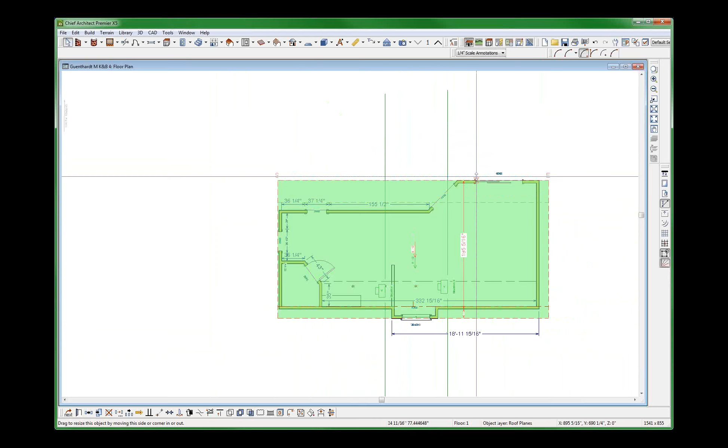Timer started, 8 minutes. I think I just learned that I am limited to, you'll be happy to learn, only a 10-minute video on this stuff. So here we go. This is what I want to do. I always believe in having a floor over a floor. I've done this before, so I sort of know where I'm heading on this. I'm just fixing this roof for DG so it's all copacetic like this.

Now, Shift G, and I'm going to try to really whiz through this. I know what DG wants. I just do. He told me this is terrible. He's got a soffit right there. He doesn't need a soffit right there. If you look at the picture, you'll know what he wants to do. The only way to do that, I think, is first of all, you always need an extra floor. Add an extra floor, build new floor up above. Yes, okay, perfect.

Now I'm going to go downstairs and I'm going to select this wall, and this wall. Control C, go up a level. 6 to paste. I don't want the door there. The purpose of this is to create that soffit that DG has over his doorway in there. So you pull this over here like this, because I think if you look at the picture, it's just a little offset like that. Delete this, come across like this, and create a floor right here, U.

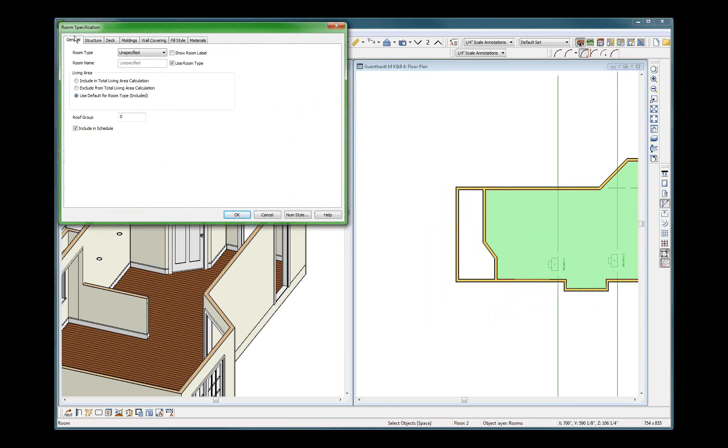And the floor is going to be, I'm going to change the floor structure to, just because it's easy for me, 11.25 tabs, so it's a 12-inch floor structure right there, okay? 108's fine. Done. This right here, U, no ceiling above this. And I'm going to tell you something right now. You cannot use that ceiling for the flat ceiling that he wants.

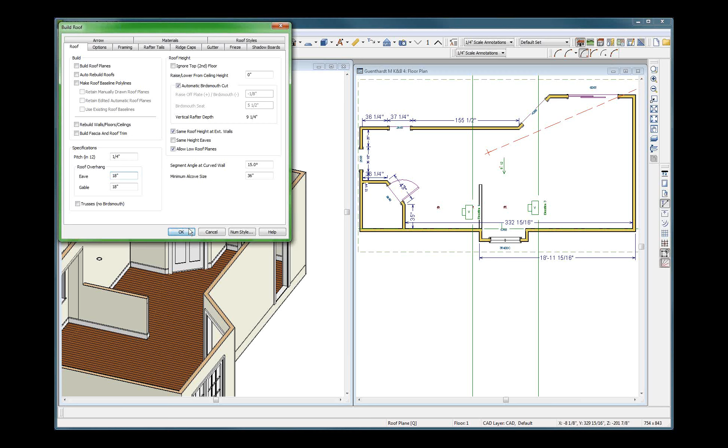So I'm going to go downstairs and I'm going to create a ceiling right now, just so you know what it looks like. He knows what this is. I got to change my roof pitch to 0, but it'll default to 1/4 inch, and I'm going to build a ceiling now. Go over to here to ceiling. What's flashing? Oh, I better hit this. Hopefully that didn't mess. So here's my ceiling. I'm going to build a ceiling like this, and he ends that ceiling right there. It ends short of that corner, okay?

Now the question is, did I build this at the right level? I don't know. I'm going to take a look at it in just a second. So that's that one ceiling right there. Shift F12 to take a backclipped cross section to make sure that ceiling's in the right location. Where's the ceiling? Oh, I got to turn on my framing. Automatic framing, you just always need it on, I think. 1, 2, and roof. Automatic roof ceiling. So I take sections FRA, ceiling, floor, turn on all this so I can see the framing.

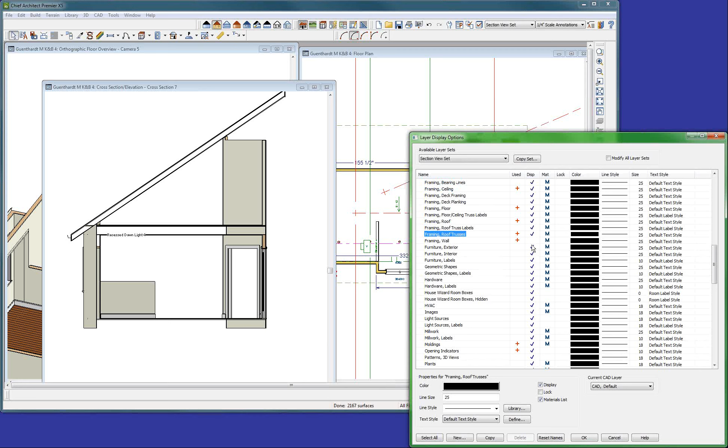Okay. Done. The ceiling's right there. I think it's right. You think it's right where he wants it? I don't care. I'm going to leave it right there, okay? Turn off the electrical labels, EL electrical labels, so I can see the light. So there's the ceiling. It's starting to build right there, but now I want to make sure it's a flat ceiling. U, lock the bottom and make it a flat ceiling, okay? Now you can see that ceiling.

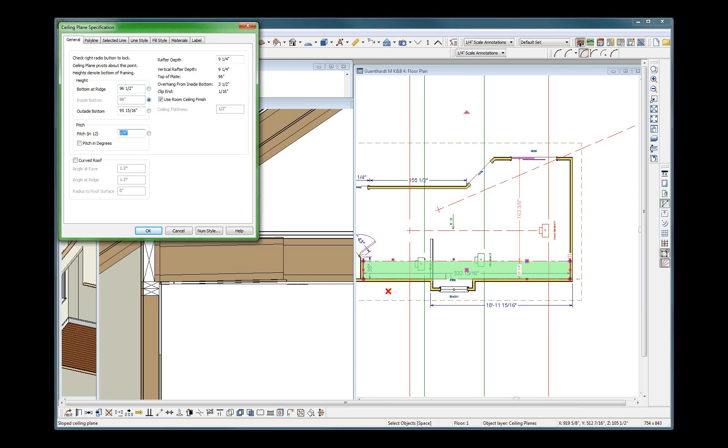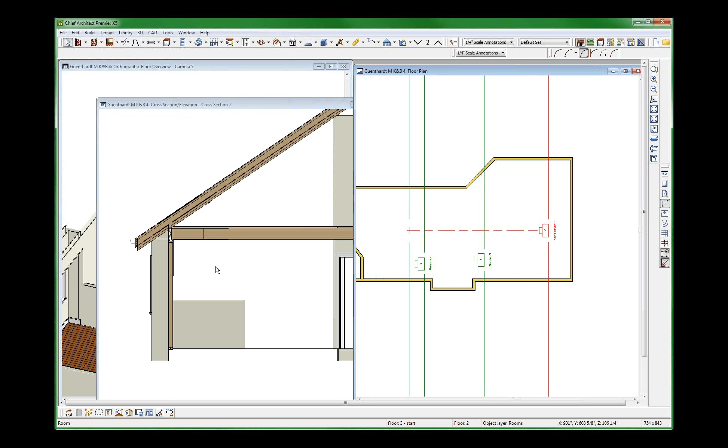By the way, this room right here does not have a ceiling. U, no ceiling or no roof. This is the first level, not the second, okay? Oh, why do I have a ceiling in there still? Oh, I know why, probably, because if I go up here, this space here has to be open to below. This space here, the second floor, U, open to below. General, open to below. Okay? Now you see a ceiling starting to generate right there.

Now if I go back downstairs, I need to change the pitch of the next ceiling to 8 and 12 to match the existing ceiling, 8. Now I'm going to make a ceiling out of it. Ceiling plane right here, and all the way across to here.

Right, I think the ceiling ends right there. Okay, so I'm going to come across like this. Part of the issue with this is his soffit skylights. He doesn't know how to do the skylights. So now, see this messy stuff right here? It's all screwed up. So I got to take this 2 to merge those 2 planes. It looks good. But one thing with this framing, you're going to notice that the framing gives it a hard time.

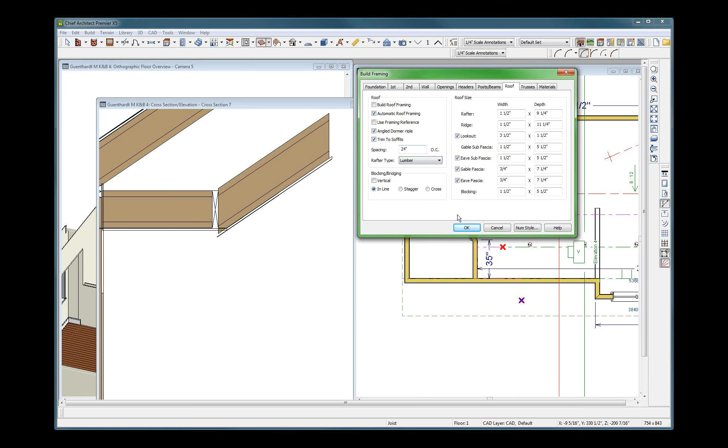By the way, see this right here? He's using TJI joists. What's interesting about this is what I learned, I think, is for the roof, if I change the framing from I-joist to lumber, it's going to switch to lumber. But on a roof, F12. Yeah, see, now it's lumber. Now the roof would. That's weird. Why did everything change? Once I built the roof planes, it should have stayed. It didn't, so I'm not going to worry about it.

So if I go back up here, W. I'm going to find out where that new ceiling plane is going to have to end. When I go Control X, down 6, that's where it ends. And by the way, if you look at, hang on, W.

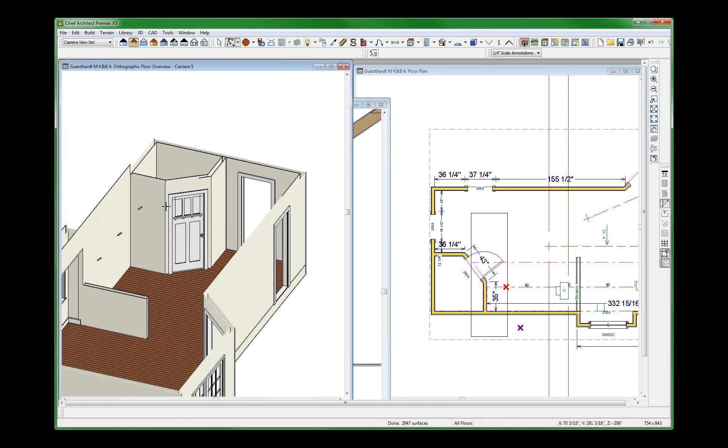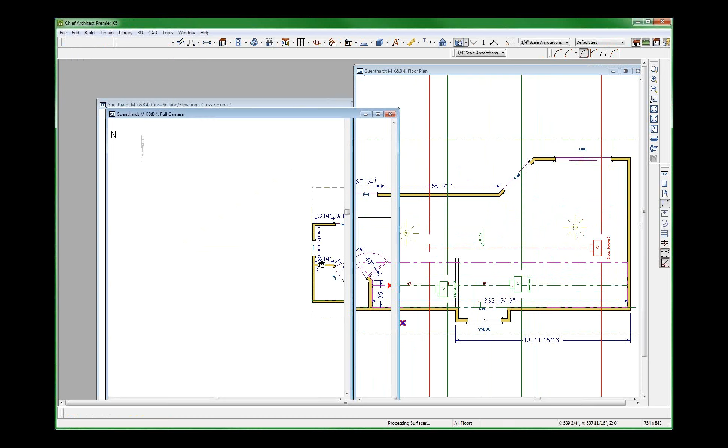By the way, I know these lights are turned on. I like to keep the lights off. There's another one right there. But I don't want that light. I don't want that camera. Okay, U. Turn it off right here. So those are all off. But I want to be able to see this thing, so I'm going to add some lights. 1, 2. It's easier for me. Shift J right across like this. I'm going to see if I can remember to show some of the things that I pointed out. That's what we've got so far.

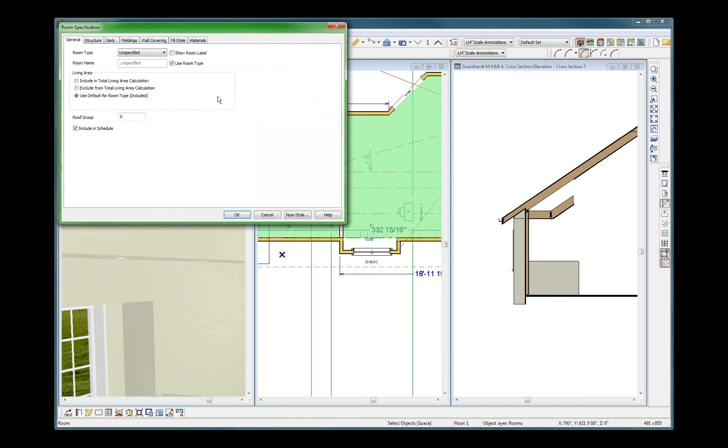By the way, I think he should come over here to 3D view defaults. Yeah, reset that. It'll look better, and see how it darkens it up. You got to do it that way. Okay, just believe me. So I'm like 1, 2. Wait, did I get the lights? Now this is very interesting right here. Pull these lights over to here, and I'm going to see where these lights are. Look at these lights right here. Oh, they're okay. Oh, because I don't have a ceiling on here. Watch this. U. Structure. I don't have a ceiling. If I put a ceiling on there, watch this.

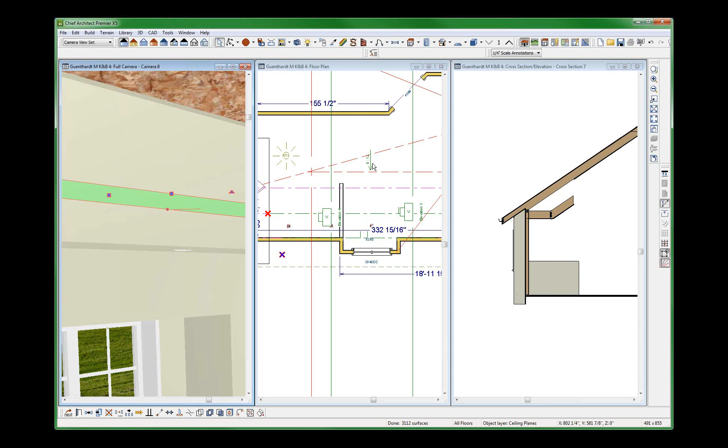Oh. Well, anyway, I guess I built this ceiling plane at the exact right height, but sometimes if you have a, do I have a ceiling in here? U. I have a ceiling in there. I'm going to get rid of the ceiling. Just keep this in mind. If these things are a little bit lower, it's because the room has a ceiling in it. You tell the room it has a ceiling, and the ceiling is actually lower than the ceiling plane that I put in. So for this light to recognize that ceiling plane that I built and not the ceiling plane of the room itself, you got to put no ceiling in there, because you're going to be building the ceilings anyway.

Okay. Now I'm going to go back over to here, and I'm going to build the rest of this roof plane, and change it to a 0 pitch. Now I can put my ceiling plane in here, and it's going to lock right onto here and up to there. Okay, now I built a higher one. 3 break, and move this over to here. You got to build this higher ceiling up here.

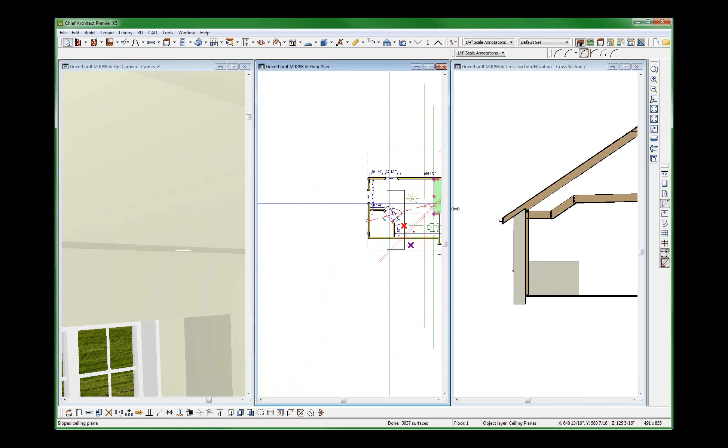I'm going to tell you, if you try to use the ceiling of the upper floor that I built, it's a mess. And if you don't have a room up above, it doesn't work either, because the skylights will not behave correctly. The only reason you have to put this ceiling in here is because of 3 break, because I'm putting skylights in this ceiling. Check it out yourself, okay? I ain't gonna do it again. Done. So now let's look at this.

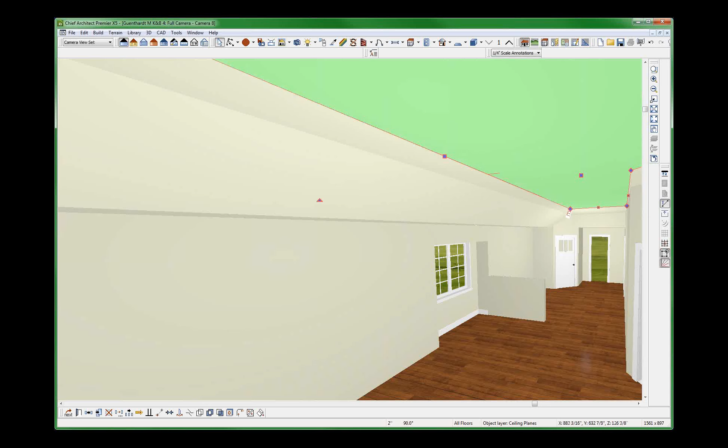How much time do I have? God, man, timer. Oh, timer. Okay, I'm gonna have to do the second part. God, why does it take so long? I'm gonna do part 2 in a second.